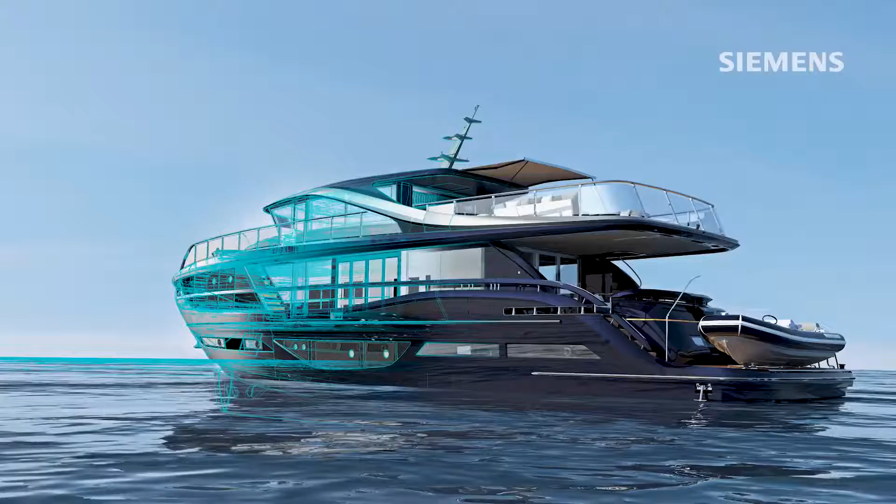Earlier this year, the industry market analyst CIMdata commented that Siemens continues to innovate and reimagine CAD design in a way that truly looks to the future of design. And this shows that we're continuing to innovate, helping our customers embrace complexity and reach their productivity goals. Our customers across all industries love using NX, like Princess Yachts, who've seen significant design efficiencies using NX, enabling them to create more complex interiors and better overall designs.

Or JCB, who are driving towards a more sustainable future with their 100% electric, zero emissions e-tech range. They're leveraging the digital twin to enable more consistent collaboration with a single source of data. And Red Bull Racing, working to an aggressive F1 race schedule. Through productivity gains with NX, Red Bull Racing were able to compress the time from initial design through to wind tunnel testing down to just 10 days.

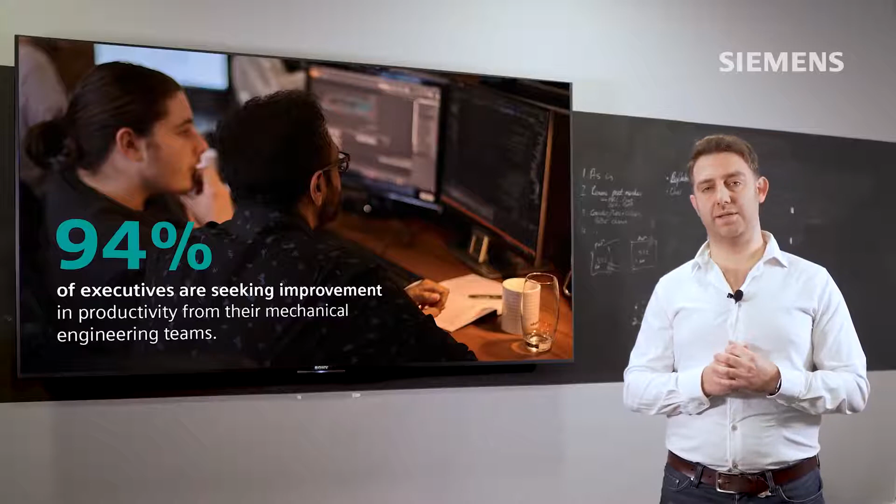Productivity is a key driver for all our customers. In a recent study by Lifecycle Insights, it was discovered that more than 94% of company executives felt that either a good amount or some amount of productivity improvement was needed from their mechanical engineering teams. Productivity and the ability to do more with less clearly affects the success of the products being designed and also the companies creating them. Taking the latest release of NX is one of the best ways to help you achieve your productivity goals.

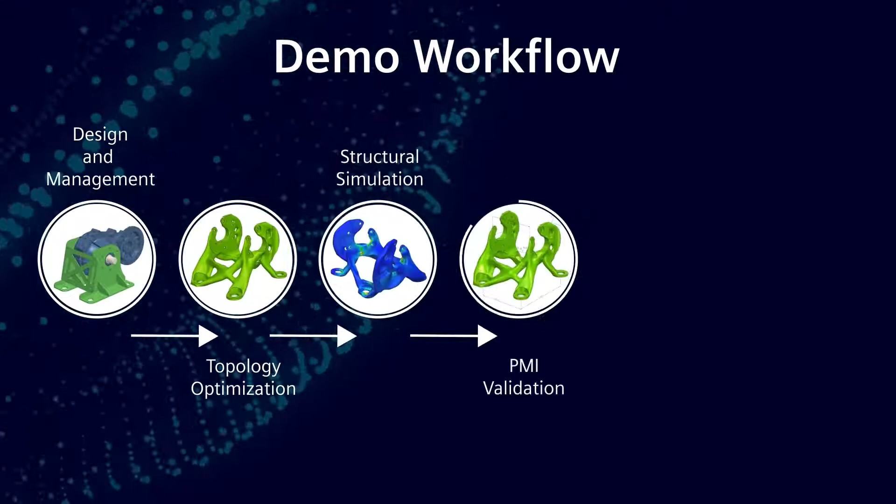For today's session, we're going to focus on a workflow that shows you how to automatically create new parts using the all-new NX Topology Optimizer. Then we'll show you how to test and validate your parts before 3D printing. We'll be showing you how you can reduce this group of 14 parts down to just a single part and also reduce the weight from around 4 kilograms down to about 2.5 kilograms. Typically, this would have required some very manual tasks by the design engineers. But NX is helping you embrace complexity and increase productivity, whilst also helping you reduce the number of physical prototypes. So, let's get into it.

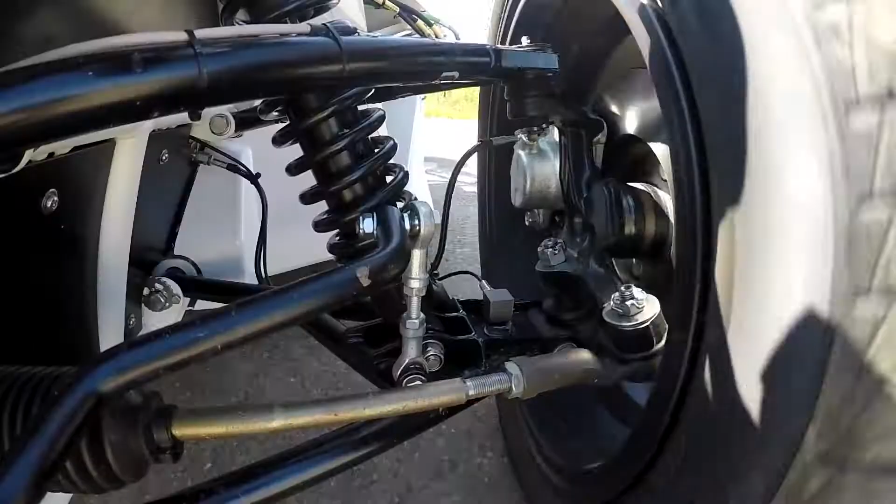Imagine we're designing a next-generation electric vehicle. In order to maximize the range of the battery system, we need to optimize the weight of every single component. In a design review of the team, the design manager identifies a group of components that could be improved. The design manager sets a target to reduce the number of components from 14 down to 1 and sets a weight reduction from 4 kilograms down to 2.5 kilograms. She creates a change request in Teamcenter and sends it through to the design team. And now to take you through the next stage of the demo, I'm going to hand over to Paul.

Well, thanks, Ben. Well, here I am in my NX session. It's a managed session, so I've got access to my Teamcenter database through Active Workspace embedded inside of NX. And I've got some tasks to perform in my inbox. Let's take a look at them. First one here is related to the gearbox bracket that Ben's just mentioned. If we delve a little further down, we can find out exactly the details of the task.

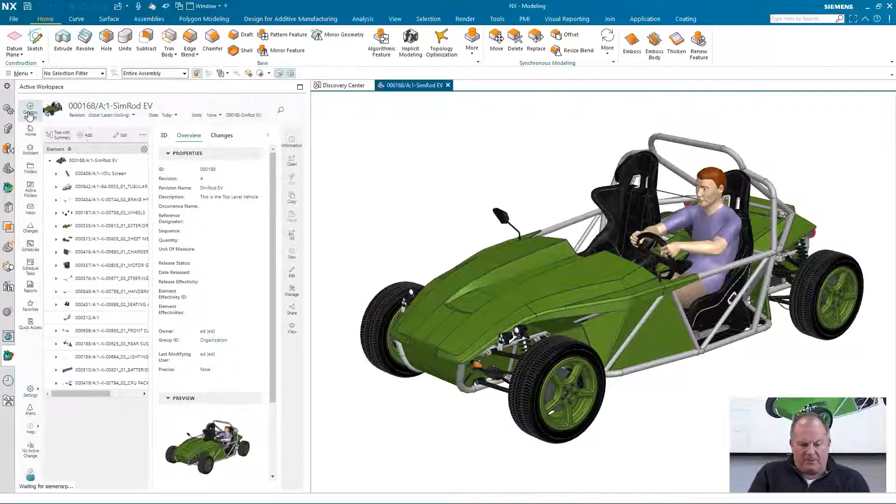And it's to use a Topology Optimization study to look at reducing both the weight and the part count of the existing bracket. Now, not only does it tell me what's required from me, but it also gives me the impacted items. So if we take a look down here, you can see obviously one of the impacted items would be the overall assembly. And we can take a look at this in a bit more detail just by opening this up directly inside of NX. Let's take a look at some of the other impacted items. So again, we just go back into our Active Workspace.

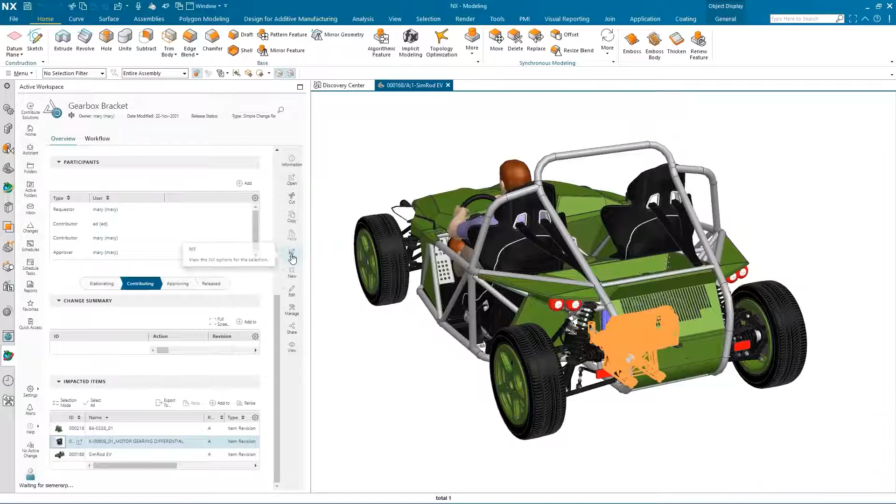If I select it, notice that the corresponding geometry in the NX session is highlighted. So we have this cross-probing, particularly useful to understand the impacted items and where they fit within the assembly. And again, if I want a bit more of a level of detail, we can open this up inside of NX as well. So you can see here the bracket and the gearbox.

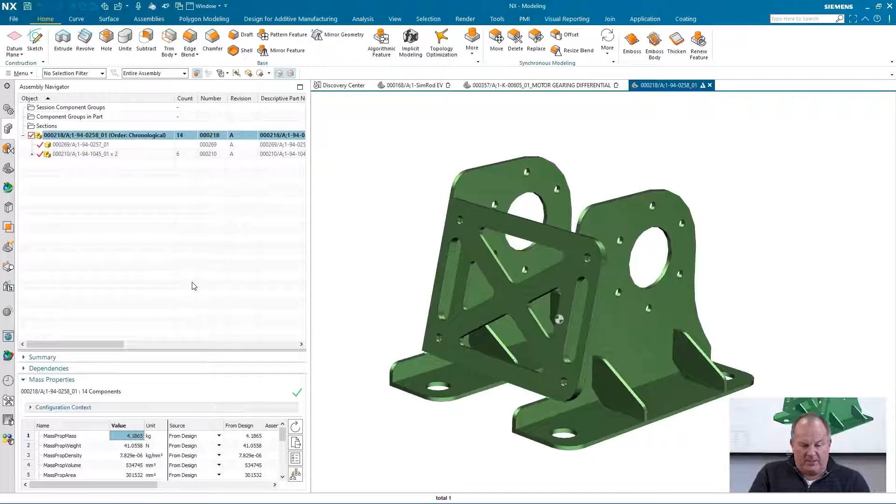Again, let's just open up the bracket. Now, as you can see from my assembly navigator, there's 14 components currently, so we're looking to reduce that. And if we take a look at the weight, notice that the current value is just over 4 kilos.

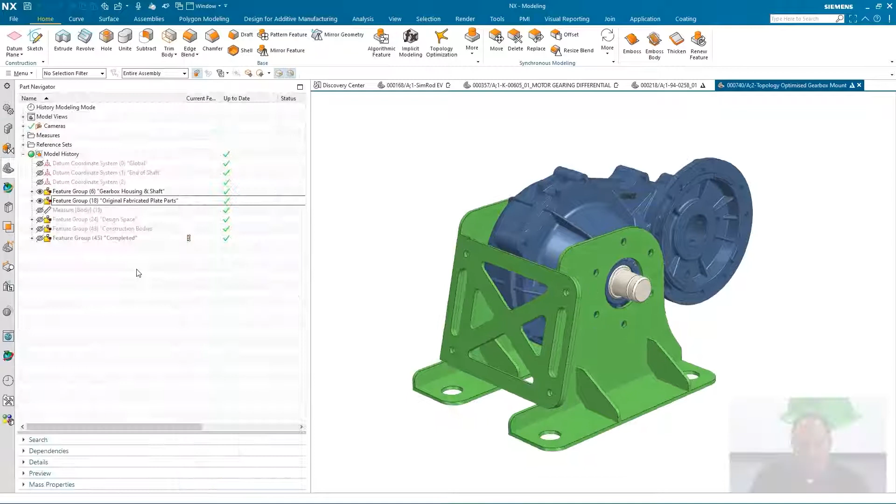Now, I've already got the start part of a topology optimization study done, so let's just go and find that. Again, if I go back into Active Workspace, I'm going to do a search for it. There it is there. And again, let's just open this up inside of NX. Now, what we'll do here is to go through the process of setting up the topology optimization. So again, we start the optimization feature, open it up, and we have our own environment.

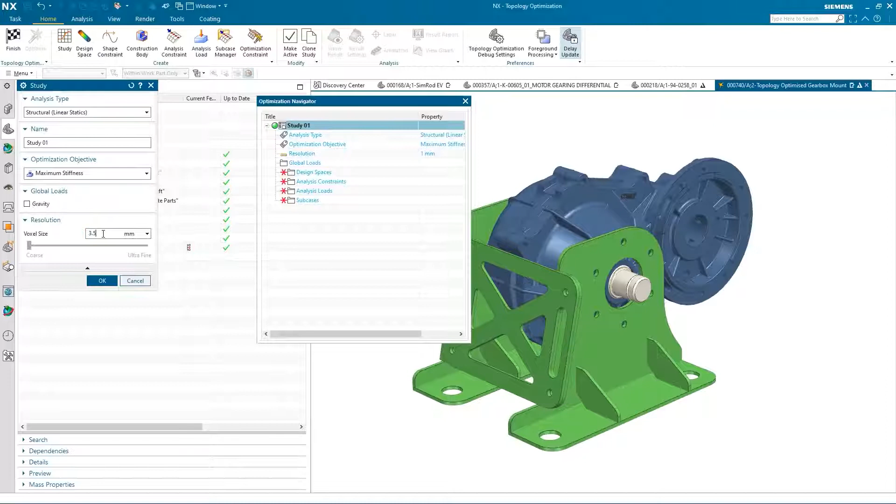And one of the key things to remember about the optimization itself is that it's now an NX feature, which means that if any of the geometry changes, then your optimization feature will also change to reflect any of those modifications. Now, I'm going to perform a study, so I'm going to edit this study. There's a particular analysis type, the objective, I'm going to look for maximum stiffness. I can modify the resolution of the result. Again, you notice that the Optimization Navigator updates to reflect that.

And I'm just going to hide now the original gearbox housing and shaft and the original fabricated part. But before I do that, the stages that I'm going to go through is I need to define a design space. So this area, or this volume, if you like, is going to contain the topology optimization study. So let's just create the design space. So again, I select the box. Notice that it automatically picks up on the material that's been predefined for that particular box. It's an aluminium, and now that's been added into my optimization navigator.

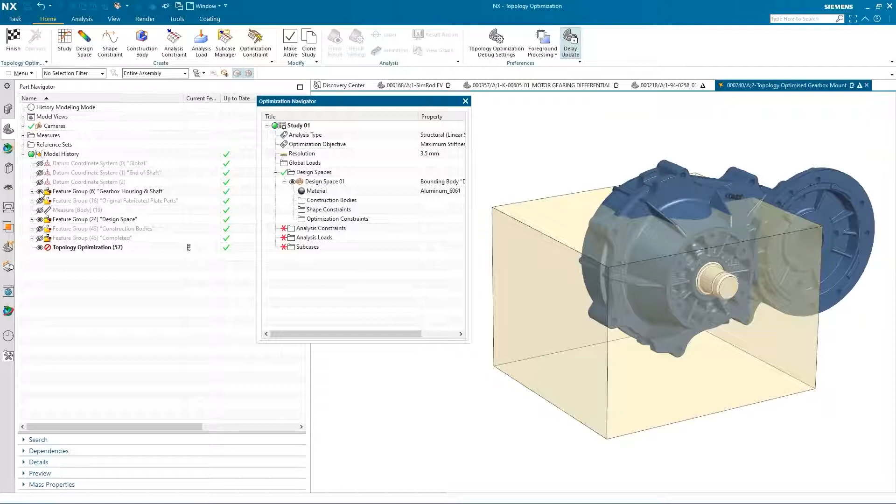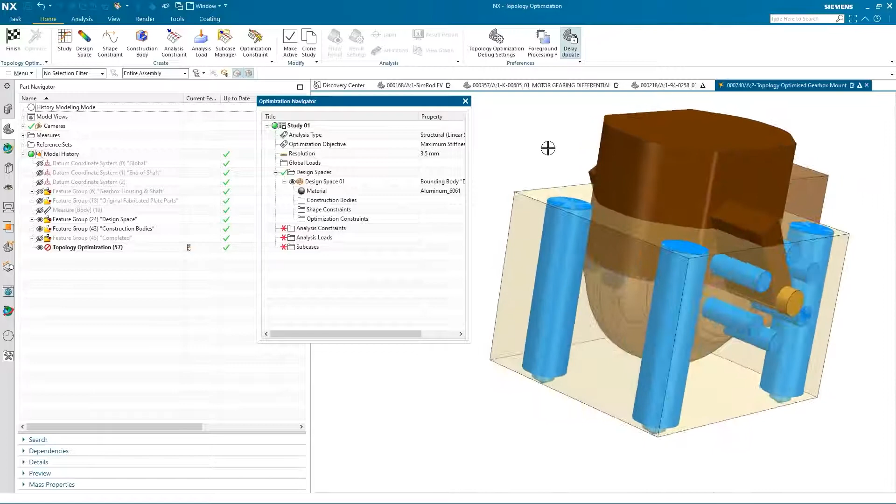Let's just hide some of these pieces of geometry we don't want to see at the moment, so I'll just hide that. And I now need to look at some construction bodies, and these construction bodies will contain geometry that you want to use as a keep out. It'll also contain geometry such as where the bracket needs to be fixed, both the chassis and also the gearbox itself. So let's take a look at the construction bodies. You can see here there's several different construction bodies, and I'll explain exactly what they do as we go through and create them. So first things first, let's create a construction body.

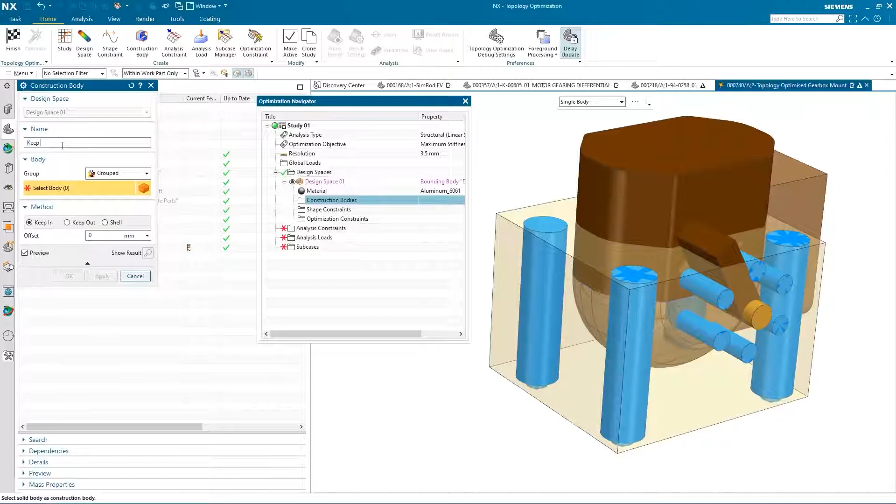I'm going to group these together. So this one is going to be keep outs. Okay, and I'm going to specify these two solid bodies. So what I'm asking for there is I don't want to see any of the optimization study encroach into that particular area. I need that to be kept free of any geometry, because that's basically where the gearbox will be sitting. I'll just remove those. And now I'm left with construction bodies that are going to define where the bracket fixes both the chassis and also the gearbox. And also we need to create some clearance for the shaft, so the gearbox can be dropped into position.

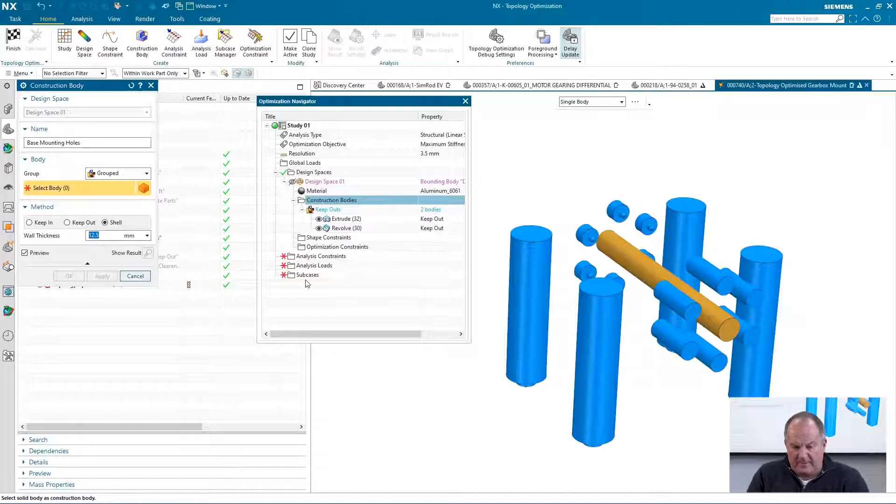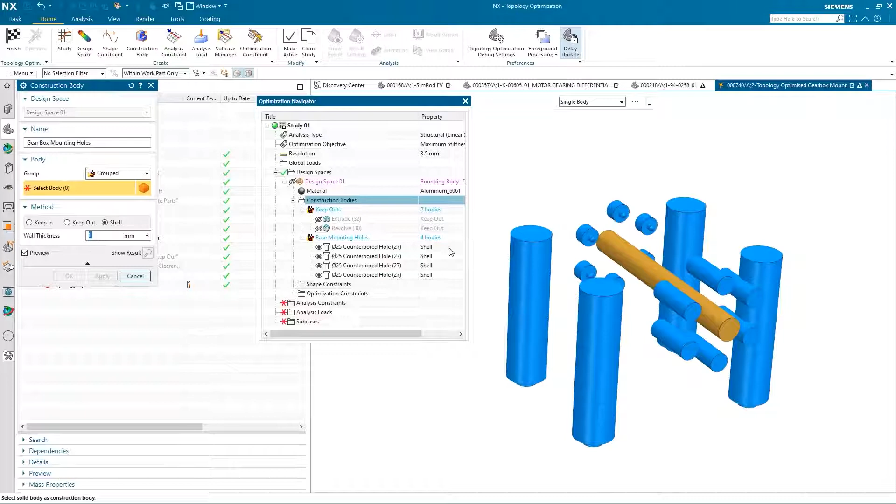So again, let's create some more construction bodies. So again, we'll have another group. This one is going to be the base mounting holes, and I'm going to select these 4 bodies here to define that, and then we're going to create the fixings for where the bracket is attached to the gearbox itself. So let's again create a group for these, and again we'll select these 12 solids here that define where the gearbox mounting holes are going to be. Again, all the while you can see them being added to the navigator.

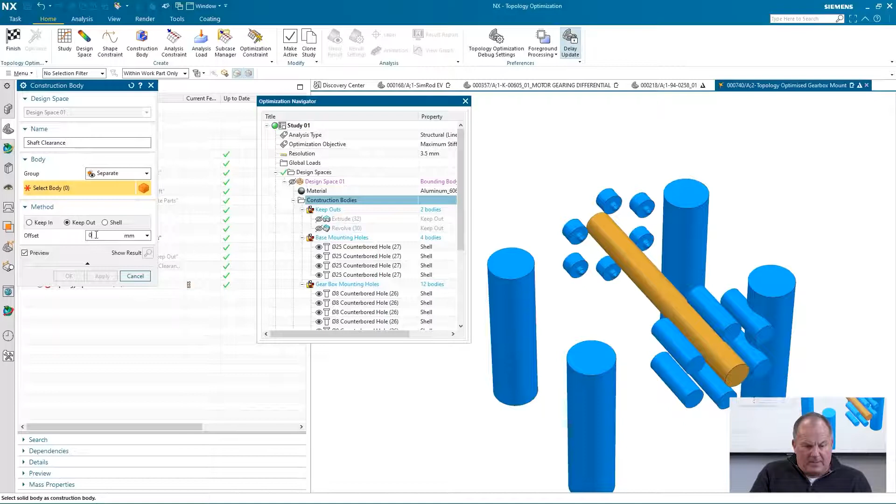And then the final one is going to be the clearance for the shaft. So again, let's just call this shaft clearance. And it's going to be a keep out. I'm going to give it an offset of 10 millimeters. Again, select the body, you can see the offset's been applied, and those are my construction bodies defined.

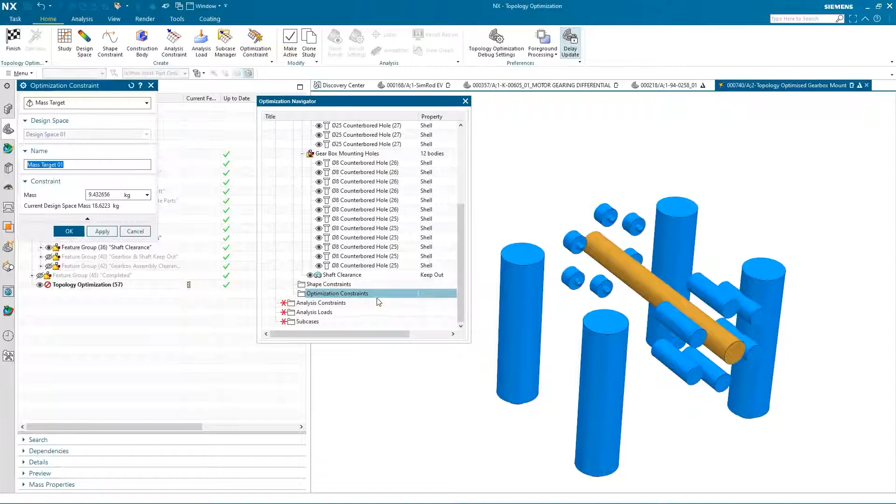So the next stage would be to add some optimization constraints. I could add some shape constraints, but in this case I don't need to. So let's add optimization constraint. And apart from obviously reducing the part count, the other part of the study was to reduce the weight. So I'm going to specify that I need this new bracket to be equal to or less than 2.75 kilograms.

I need some constraints. So every topology optimization study would require some analysis constraints. And what I'm doing is I'm going to select these 4 faces here to be fixed. Now, there's a set number of load cases that I want to add, and I'm going to specify 4 specific load cases. So again, there's a default one, but I can just add another 3 very easily.

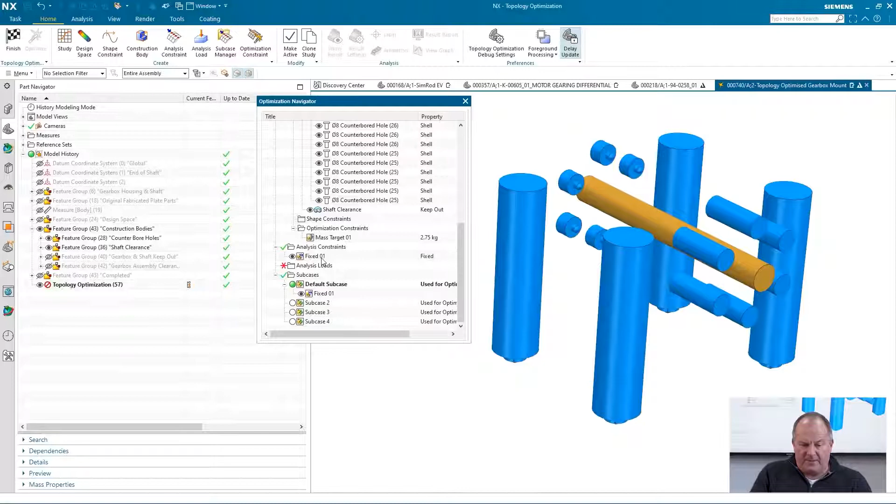And I also want to add that fixed constraint into each of the other subcases. And it's easy to do. I can just literally drag and drop into the subcase.

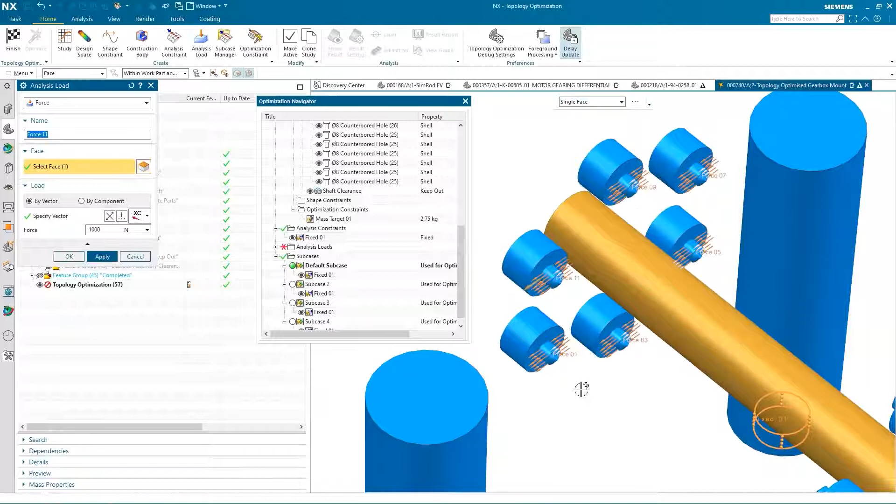So the final piece of the puzzle, if you like, is to add some analysis loads. Okay, so I can specify a vector or a component. In this case, I'm going to go for a vector, specify a value. And now I need to attach these loads to areas of the bracket. So these fixing holes, for instance. So again, I just pick on the faces and attach these loads to the one side of the bracket and then the other side of the bracket.

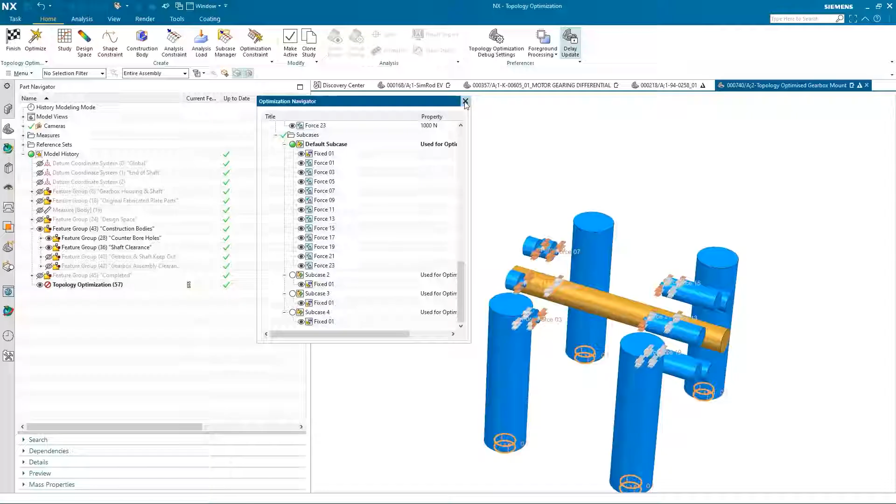And I would do that for each of the subcases. Slightly different load, slightly different direction, but it would be done for each one of the subcases. And then you utilize all of these subcases during the optimization study. When those were completed, I would then go into the optimizer itself and start the optimization study. Now this took around 5 or 6 minutes to do. I'm not going to do it live in this particular session, but I do have one that I've already completed, and we can take a look at that.

So let's remove the construction bodies. Let's bring back the gearbox housing and the shaft, and bring back the one that I've already completed. And there you can see it. So again, I've got that clearance that I've set, so I could bring the gearbox in. I've got all those keep-out areas as you noticed again, so there's no geometry inside of here. And I've got the construction bodies that I used for the base mounting holes and the gearbox holes included in there.

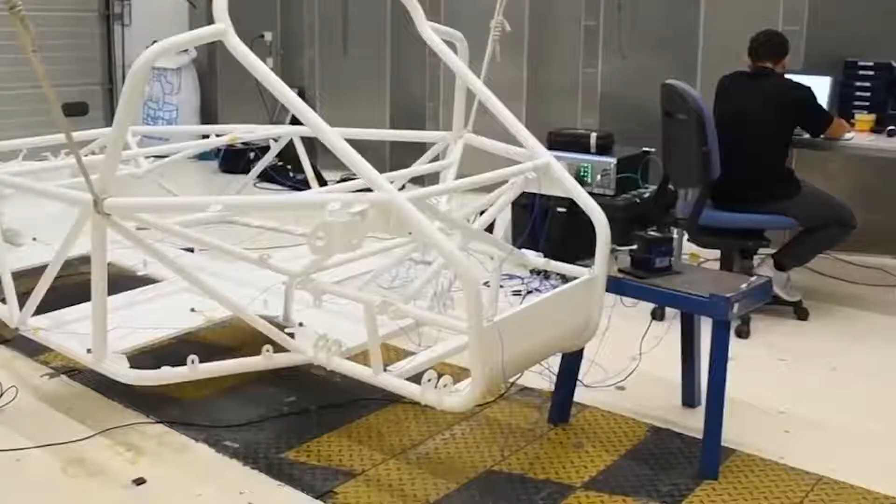Later that day, Paul, who is in the UK, calls Jeff, who's based in the US, to discuss some design simulation for the new part.

Hey Jeff, how you doing? I'm good. Hey listen, I've got something I'd like you to take a look at. It's a topology optimized part. It's a gearbox bracket. So I'd just like you to check it and validate that it's fit for purpose. Okay, I can see your screen now. Okay, so you can see that it's an interesting shape. It was optimized. I just want you to check out that there's no areas of concern that we need to be aware of. Okay, I have a good idea of how I can analyze this. Let me take a look, and when I have some results, I will give you a call back. Appreciate it. Thanks very much. Yeah, you're welcome. Anytime.

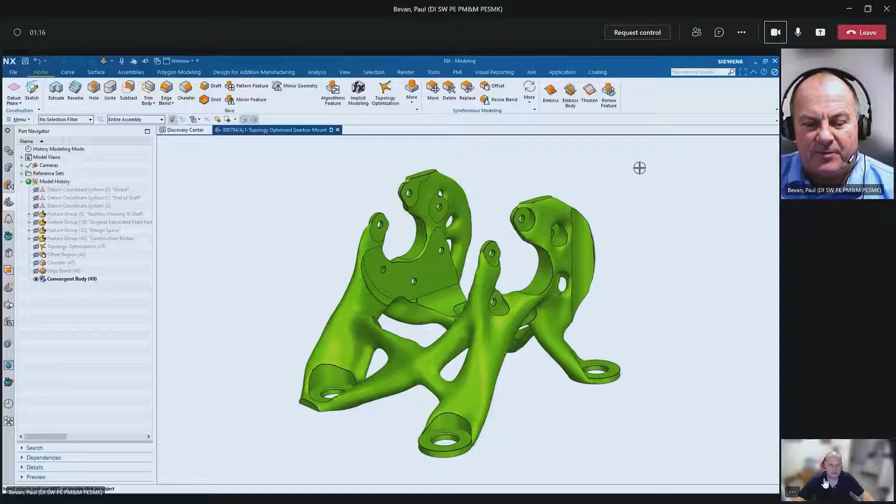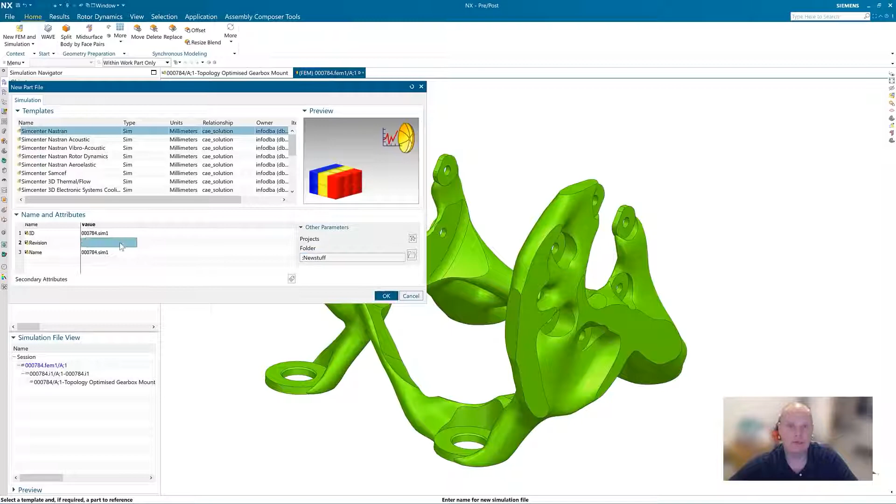Follow me along to perform a design analysis so that we can give Paul the feedback that he needs. We will start by loading the optimized part, which is a convergent body, from the server. We will use an application inside of NX called Pre-Post to perform the analysis. We will create 3 files to contain all of the CAE data that we will be generating. The SIM file will store information such as loads and boundary conditions. The FEM file will contain our nodes, elements, and material data. An idealized part is created as a duplicate of the CAD model so that we, as an analyst, can make changes without disrupting the workflow of the designer.

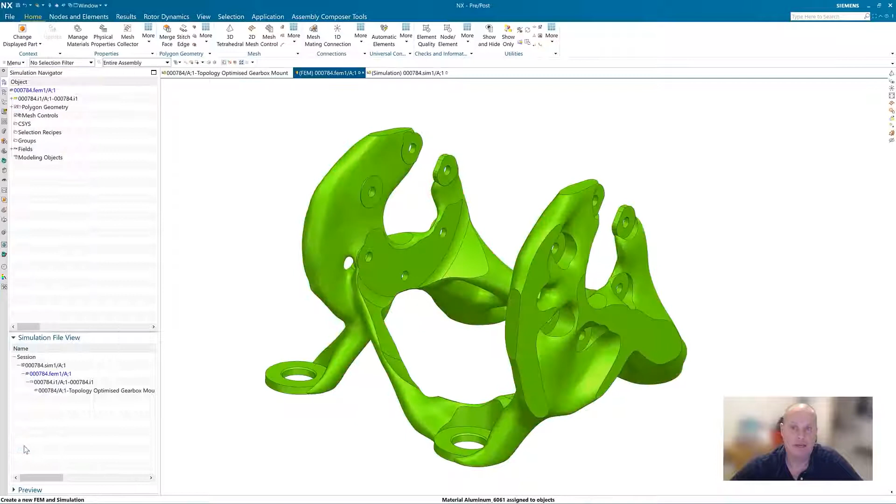Next, we need to assign a material to the part and then generate a 3D mesh. I like to click on the lightning bolt to get an approximation of the recommended mesh size. Don't go any larger than this, as it can make for a poor quality mesh. A reasonably smaller number than the recommended size will give better results without forcing the solution to take too much time.

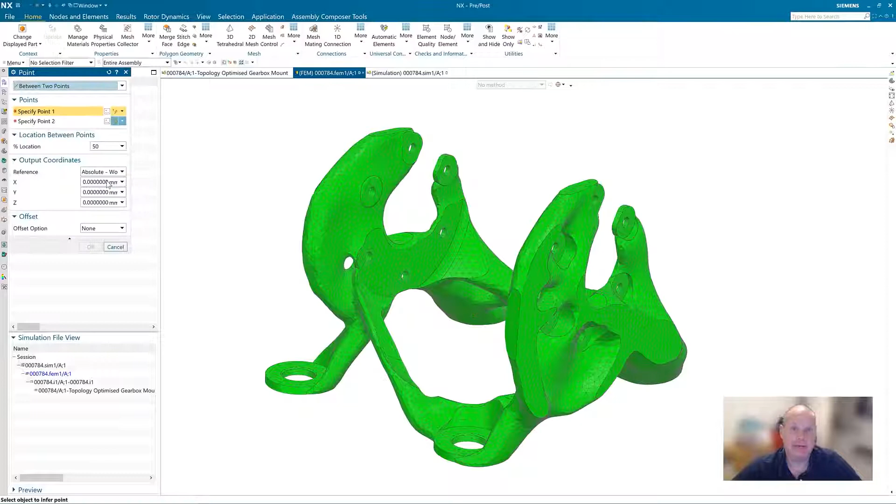Now we need to create a rigid element with its base node at the approximate location of the center of mass of the gearbox that attaches to this mounting bracket. We don't need to be exact for this analysis, as we are only trying to provide baseline guidance to improve the quality of the design. Use the between 2 points method to get an approximate location. Now that the base node of the rigid element has been created, we will connect it to all 12 of the mounting holes on the bracket.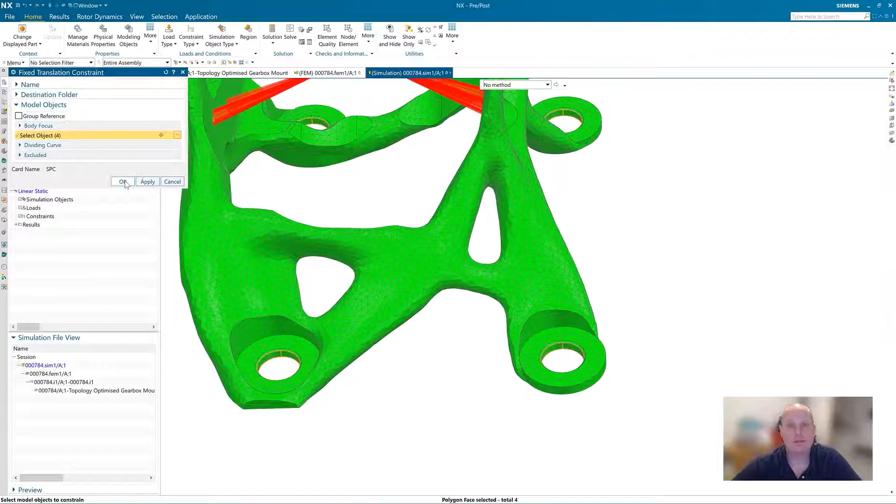Now we will move on to the simulation to create our boundary conditions and to solve our model. Our boundary conditions consist of constraining the bracket at the 4 mounting locations. The load is applied at the approximated center of gravity of the gearbox. It is meant to imitate a force of 3 times gravitational acceleration in the direction of travel of the vehicle. The mass of the gearbox is used in the magnitude of the force. Solve your model using the integrated Simcenter Nastran solver.

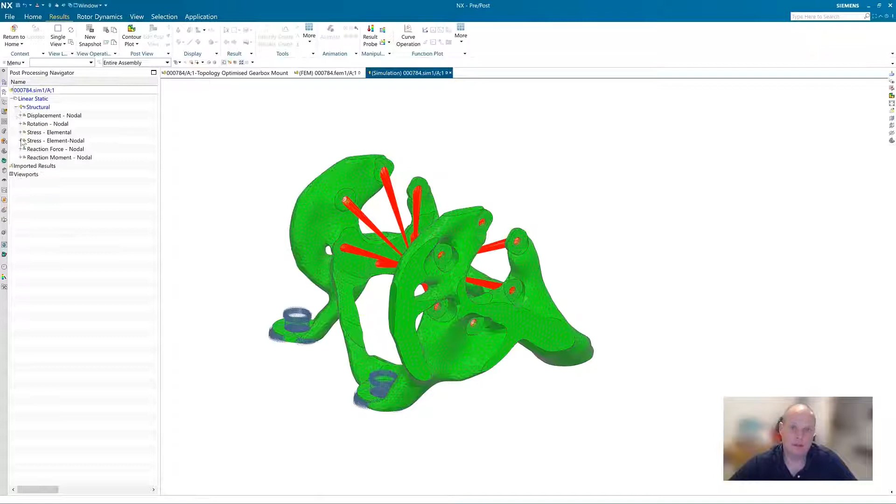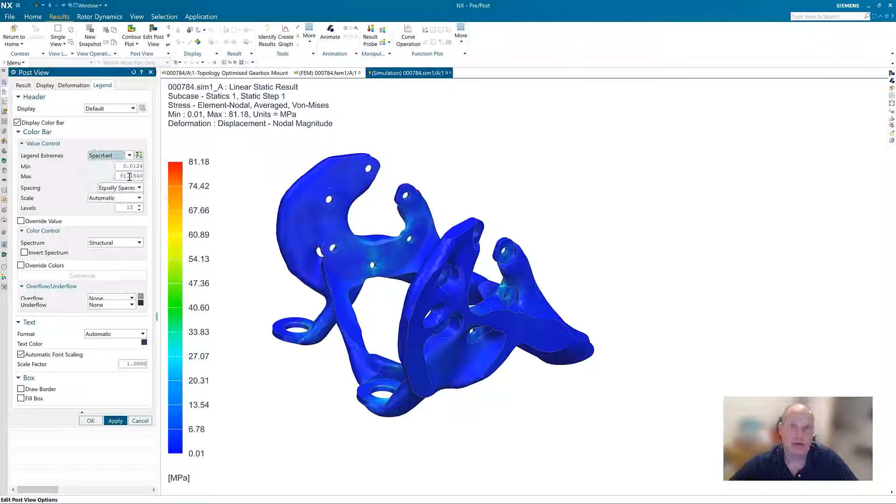This should only take a couple of minutes depending on what kind of computer you are solving on. Now comes the reason for performing the analysis, evaluating the results, and giving recommendations to your CAD designer. When displaying stress results, it is a good idea to turn off any elements that are not needed, clean up the display by turning off element edges, setting the results to average at nodes, and finally changing the scale for effect. Let's interrogate the CAE results so we can make recommendations to Paul.

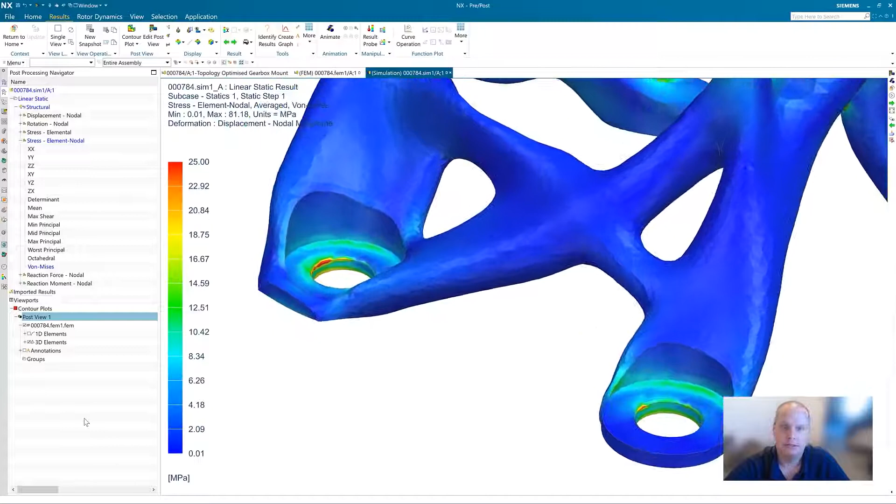Every structural analysis will indicate the locations of maximum stress with a red color contour. You will see a few areas in the model that have a color red. But we do not need to be concerned, as the overall magnitude of the stress is very low. The results indicate we have a good design that will be able to handle the performance requirements for the part. Later that evening, after Jeff has finished his simulations, he gives Paul a call to share the results.

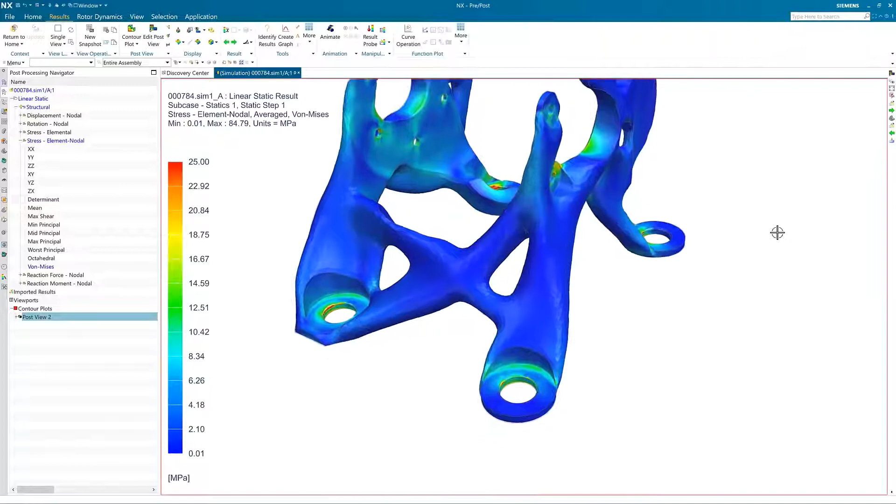Hi, Paul. Okay, are you seeing my screen? Yes, I am. Okay, so I just wanted to point out a couple things. First of all, when I zoom in on the 4 mounting holes, you're going to notice the red spots. You can ignore that because that's just a result of the way that I set up my model. So those are artificially induced high stresses based on the boundary conditions.

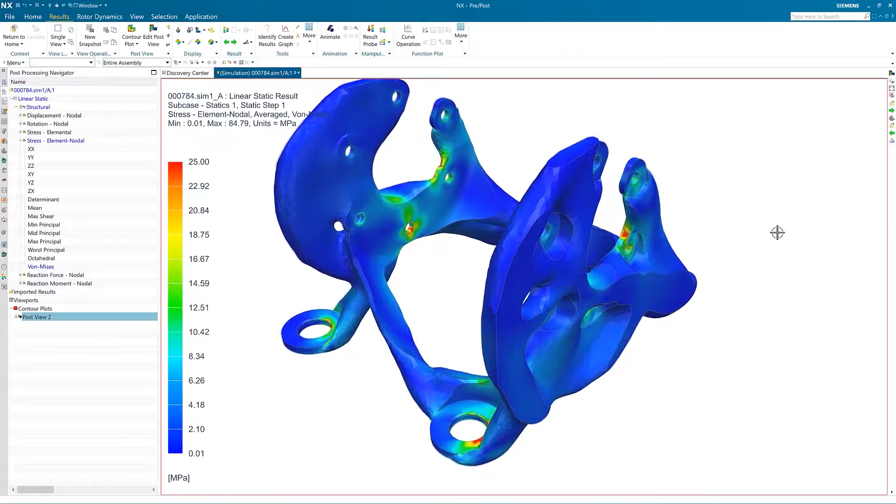But when I interrogated the model and looked at the results, I do see that the overall stresses in the rest of the model are very low relative to the endurance limit for the material. So I would say that you're okay from a structural performance standpoint.

That's good to hear. All right, well, thanks again. Yeah, thanks. It's always good to work with you.

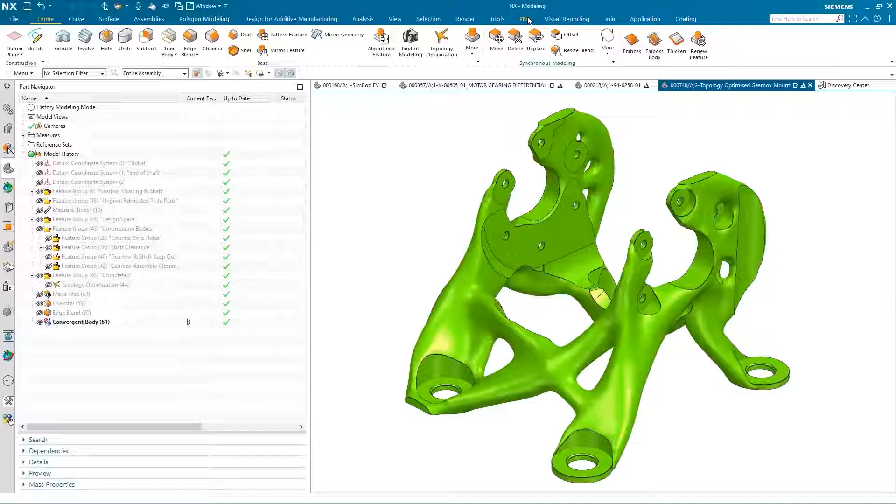Back at the office, Paul begins implementing the changes recommended by Jeff. So the next stage of the process is to start to document the model using model-based definition, and in particular, product and manufacturing information, or PMI. So I enter the PMI application. I have a number of commands that are available to me to document the geometry.

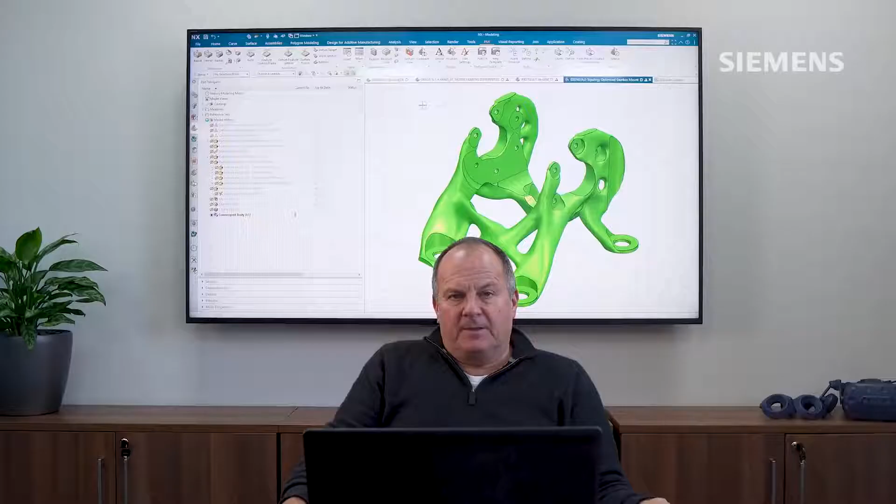Typically, I'd select one of the commands and start to pick geometry off of the topology optimized result. But in this first instance, I'm going to use one of our pre-configured rules. These automate the ability to apply PMI to the model. So in this instance, I'm going to look at creating the size on all of the holes in my model. I invoke the rule. It's now intelligently searching the model to find all of the holes within the part and applying the PMI information directly to it.

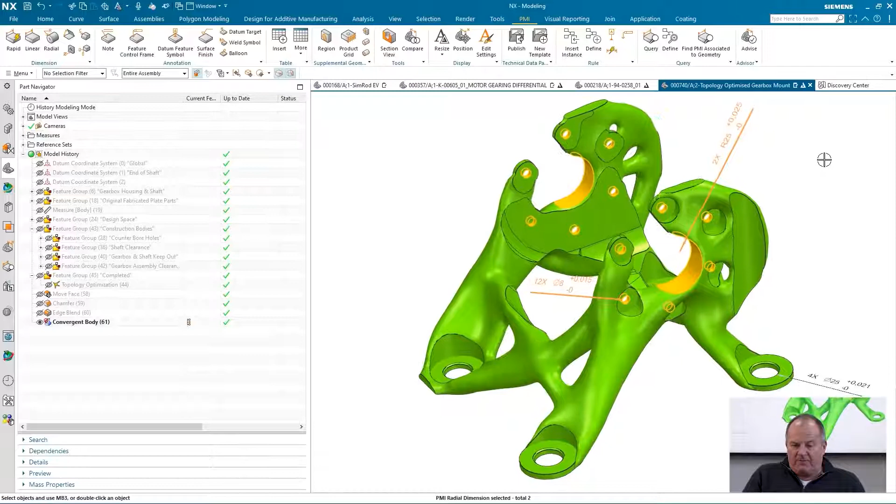And as you can see, it's found the 12 holes that connect the bracket to the gearbox, the 2 large holes through which the shaft passes, and the 4 holes that are used to connect the bracket to the chassis. Now, as I said, there are a number of other commands that we can use. So if I want to add further PMI, again, I can just pick geometry directly off of the model.

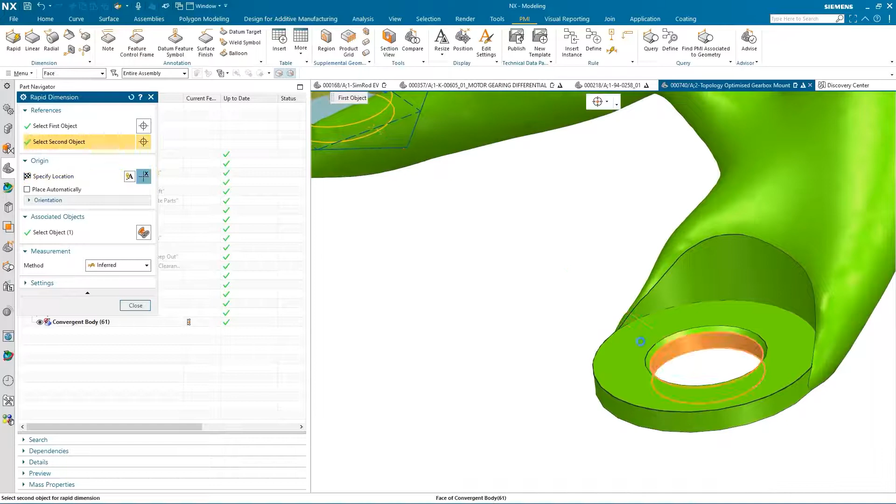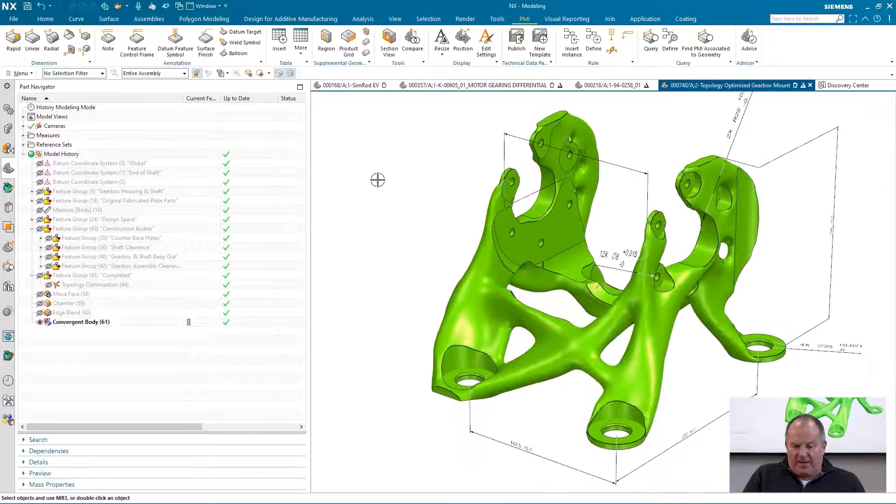Okay, we're going to add some tolerance to that. And again, it's as easy as that. I'm just literally picking geometry straight off our optimized result. So we could continue, obviously, to completely and fully document the model, but you get an idea in this demonstration of some of the power of being able to apply and fully document a model with PMI, either manually or with one of the pre-configured rules that we have at our disposal.

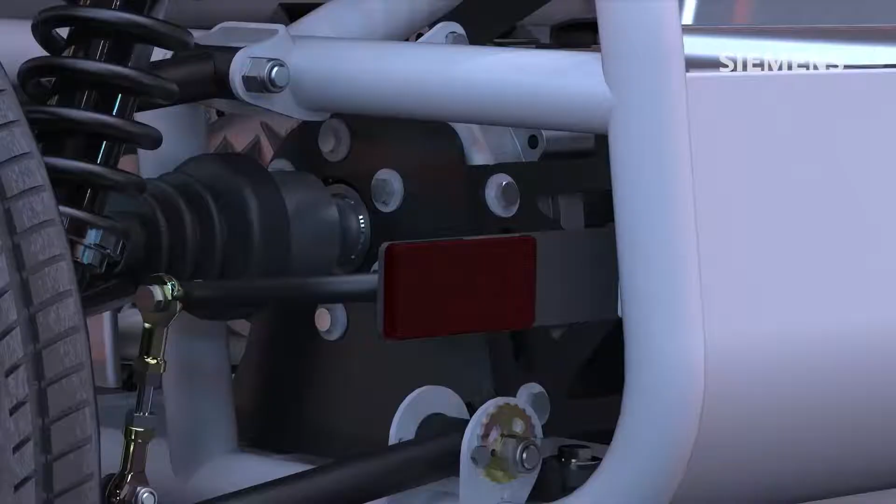In the final part of this section of the demonstration, we're going to replace the existing bracket with this new optimized model. So let's take a look at doing that. Okay, we'll pull up our subassembly that contains the original bracket. And the first thing I want to do is to remove that. I can also remove these other components.

Let's add our single piece bracket in. We know the part number. Let's see, we've got a thumbnail of that. Let's snap that to here. Just position it like so. And then we can use the assembly constraints. And there we have it. Our part is now being added in to the original assembly.

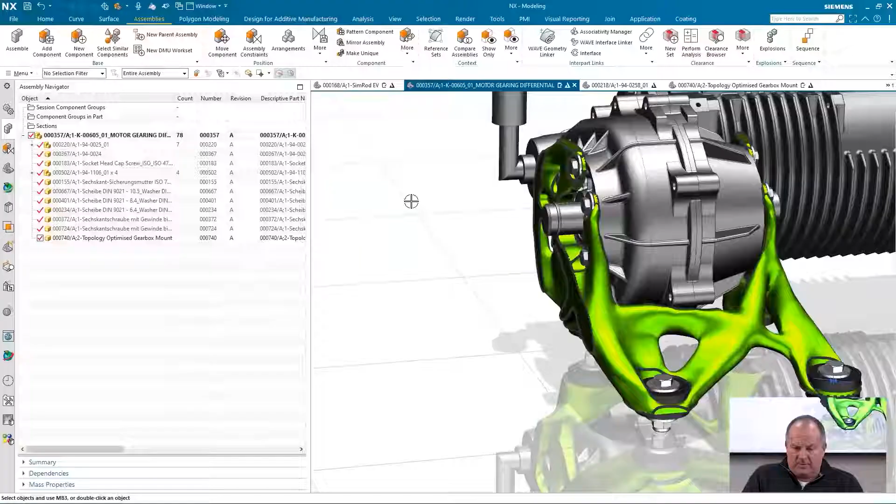If we take a look at the top level, again, let's just take a look inside. You can see that our new bracket fits nicely within the overall assembly. I've completed my tasks. I've done the topology optimization study. I've then done some modification to the result, adding some NX features, adding some PMI, and now I'm going to hand it over to my colleague Ashley, who's going to check to make sure that it's 3D printable. So I'm just going to give him a call.

Hey, Paul. I've just done a topology optimization study on this bracket for the gearbox for the vehicle. I think it's come out rather well, but I'd like for you to take a quick look at it. Yeah, okay. So like a little validation just to make sure it's printable, and I guess we should throw it into a build tray, create some support structures.

And we're planning on doing this on a Renishaw, right? Correct, yeah, that would be really good. Sounds great. No problem. Take care.

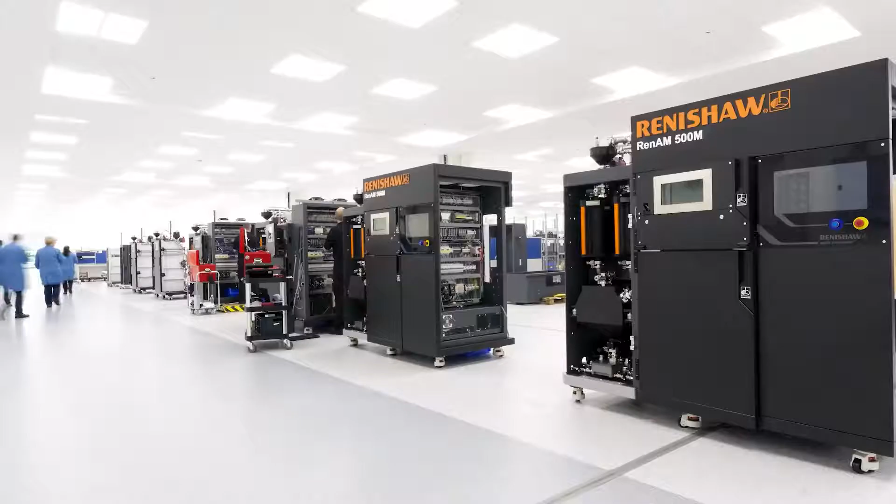Bye. Hi, everyone. So Paul's given me this really great topology optimized part that he sent over. It's for some sort of motor mount, gear mount, gearbox mount, that sort of thing for an automobile. And so we're going to print this part using aluminum and additive manufacturing.

The problem here is that additive manufacturing is really accurate these days, but it doesn't always produce parts that are accurate within tolerance. And if you want exact surfaces within some really tight tolerances, then you often need to print your part and then send it on to a downstream machining step. And that's what we're going to do here.

Now, to do that, I need to alter this geometry a little bit so that it has the material it needs for the post-print machining, so that we can machine those parts away and get the exact surfaces we need. So I've got to print a part that's not exactly the part that Paul sent along, but sort of an interim version of the part. And then when Joe gets the part and does the machining, he will machine it back to the exact surfaces that Paul has designed.

Now, the great thing about this particular part is that it came out of our new topology optimization system, where we get actual faces inside the model. So I've got my selection here turned to face, and you can see that straight out of topology optimization, we've got things like these holes have actual faces, and these planar regions are actual faces. So that makes it very easy for me to go through and do the modifications I need to do to get this part ready for printing.

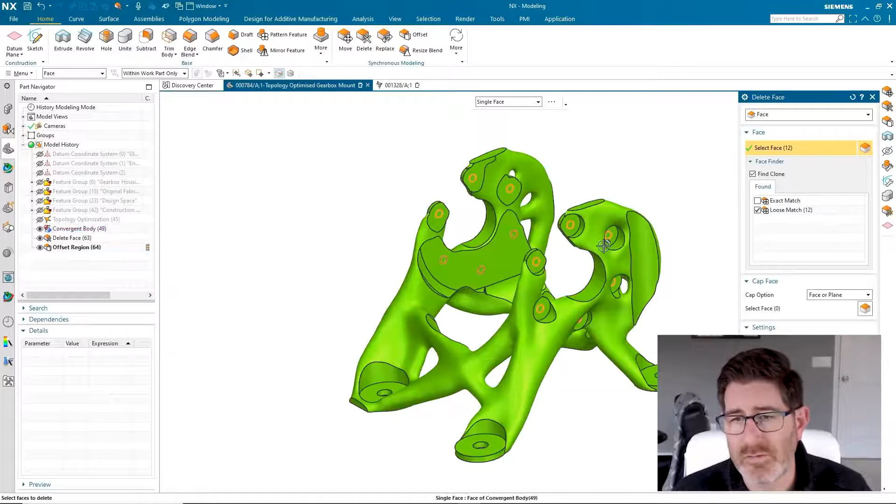These top holes I'm just going to get rid of. They're small, and again we need some meat up here, so I'm going to tell it to loose match those. It's going to find all 12. Those I'm just going to get rid of. We know where they're at, we know what the diameter needs to be. I'm just going to fill them in, and we'll have those ready for machining as well.

The final step is down here on the bottom. We have these 4 sort of feet, and we want those to be all perfectly planar so that when we mount this in the car, it's not going to wobble, it's not going to torque and have any undue stress put on it. We want those to be perfectly planar. So again, we're going to build up those surfaces just a little bit and machine them back so that they're perfectly planar.

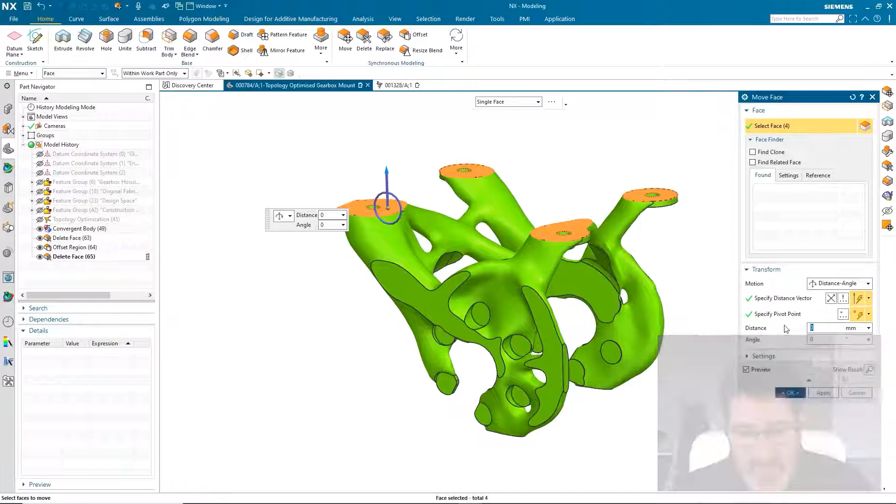I'll use the move command to do that, and I'm just going to pick each one of these faces here, and I'm going to move them up by about 2 mils to give us enough material to machine away. Hit OK, and again, this is all done, what has it taken me, 2 minutes maybe to make all of these edits? If you were doing this with a system where you had to just edit the facets, you would not be doing this in 2 minutes. This would be a project.

So you can see how easy it is in our new system with the new topology optimization, the types of geometry it returns to get a part prepped for printing. The next step is to put that into a build tray, so I'll be back in just a minute and

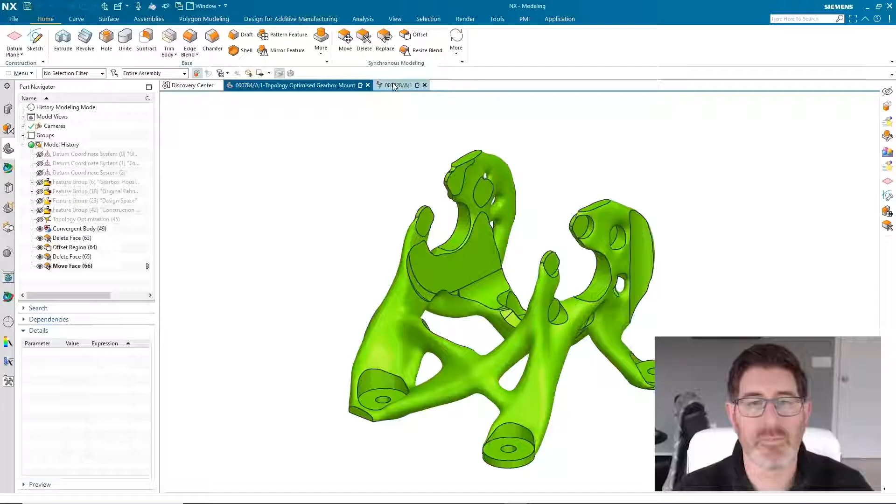we'll do just that. So we now have a part that we've designed for additive manufacturing. We've manipulated the geometry. Now we need to put it into a build tray and get it set up for printing. So I'm going to go over this part where I have basically an empty part. I'm going to select my printer, and then I'm going to add the part to the build tray.

Now I don't really care where this part comes in. It's probably going to be thrown out in space wherever it was in its native assembly at the moment. But I don't really care because I'm going to take that part and I'm going to run it through a new system we have for correcting for distortion.

So one of the real problems with additive manufacturing, especially metal additive manufacturing, is distortion. Now that can throw a part out of tolerance. It can even cause failures within the print where you end up with a really expensive door stop. Lots of these things can be mitigated by controlling the distortion that the part goes through as the little bits of metal and the different layers of the part are heated up and cooled down within the printing process.

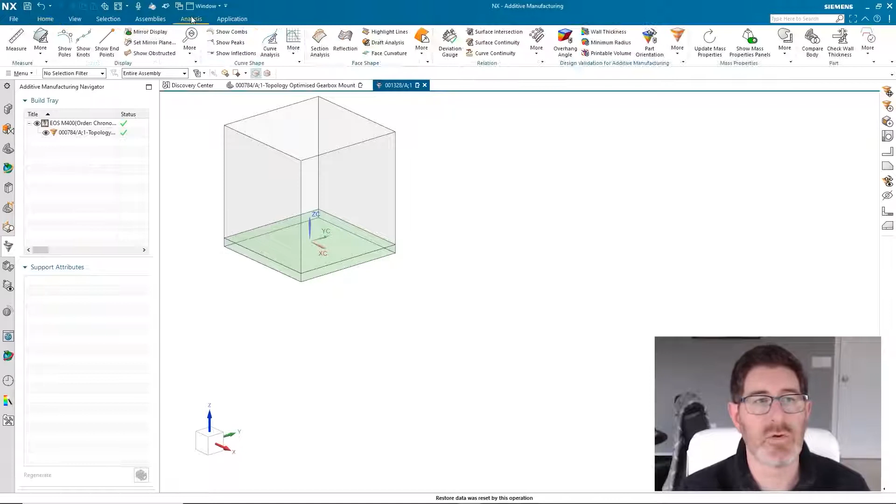Now, a lot of distortion problems can be alleviated by orienting the part in the proper orientation. And we have a tool that allows you to do that called the AM Build Optimizer. Now, in the latest release of NX, we have integrated that tool into the NX system, and it's up here under the analysis menu. If you go to more and say thermal distortion, you can invoke this tool.

Now, what this does is you pick your part, and the tool will take your part with a couple of characteristics you hand it here. It will upload your part into the cloud. It will run 100 different orientations of the part, running a simulation for distortion on each one of those orientations, and hand you back the orientation that has the least amount of distortion possible.

And then you can move on to building things like support structures and all the rest of the things you need to do to print. But this is one way to really help the initial print quality for parts without having to go through some really trial and error type operations that have been done in the past.

So I'm going to go ahead and invoke this system. It's going to go run and do about 100 different orientations, and it's going to come back with an orientation for me. And then we'll do a few more things to it and get it set up for printing. So I'll be back in just a minute.

So the system's come back, the AM Build Optimizer's come back, and it's given me this orientation as the orientation that it believes will give me the least amount of distortion. So now the last thing to do here is to create supports. Now I've gone over here in my support structure library. I've got a bunch of supports created here under this new support profile for blocks and cones and tree supports and all those sorts of things. And you can see that reflected over here in the dialog.

Now I can do automatic supports, which we'll do here in a second. We also have the option to do manual supports where I pick the areas that I want. The system finds the areas to support and I pick which ones I actually want to be supported. I can do regions only where I make regions that are supported, or I can do automatic, which is what I'm going to do here, where the system finds the regions it thinks need to be supported and supports them.

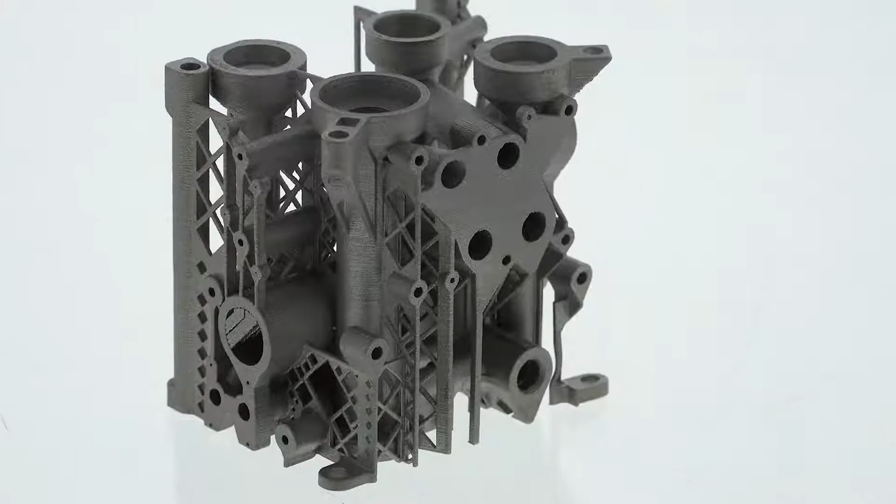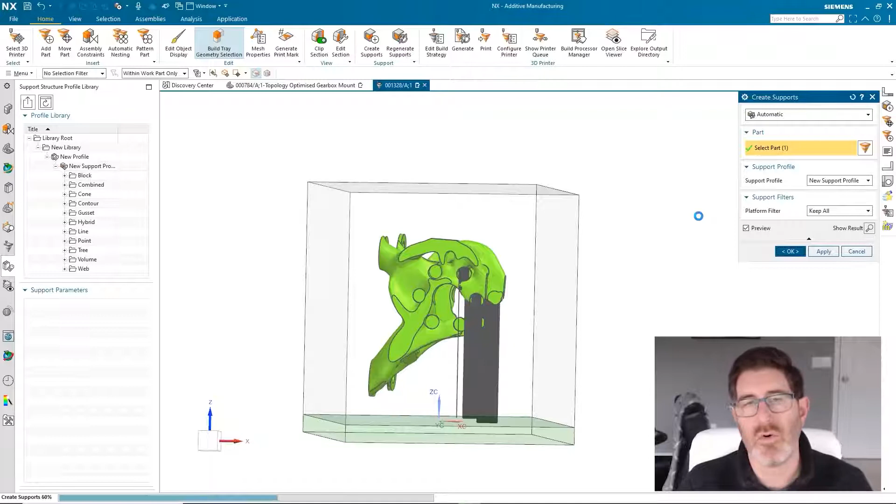So I'll select my part. I will get a preview, basically showing me these red areas down here where the part needs to be supported, and I'll say OK. And the system's going to go through and it's going to create support structures for my part so that when this part is printed, it's not going to sag or distort or have any effects of gravity on it, like you might see if you didn't support it properly.

Now, it's not going to maybe support all of those red areas it showed me. It's going to do a further analysis once I hit OK, further analysis in the preview, so I may get a warning here saying that some areas didn't actually need support. Yep, just like that. But now we have a completely supported part.

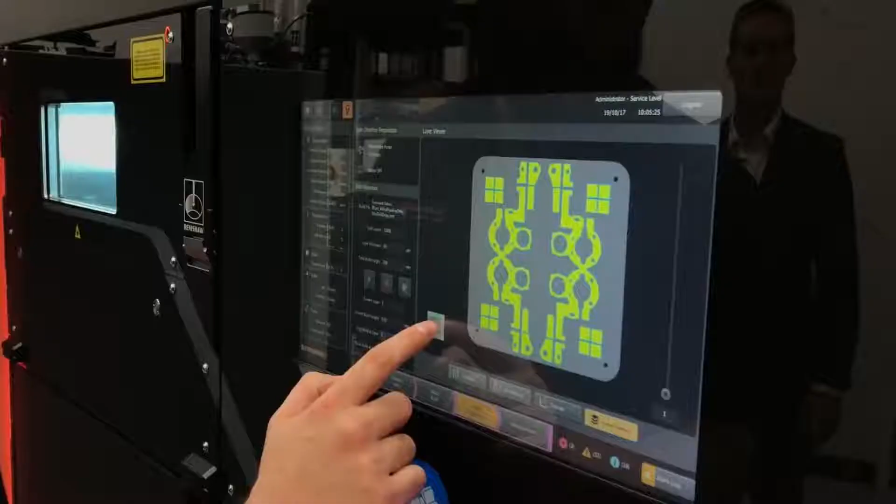I can take this part, I can set up my build strategy for my printer, generate the actual print commands, send those to the printer depending on which printer type you have, all directly inside of NX. And sometimes, depending on the printer, again, I can also look at the build processor manager and open the slice viewer to understand what each slice, what each layer of my print's going to look like, all from within inside the system, no STL files to drop, and all completely integrated from beginning to end.

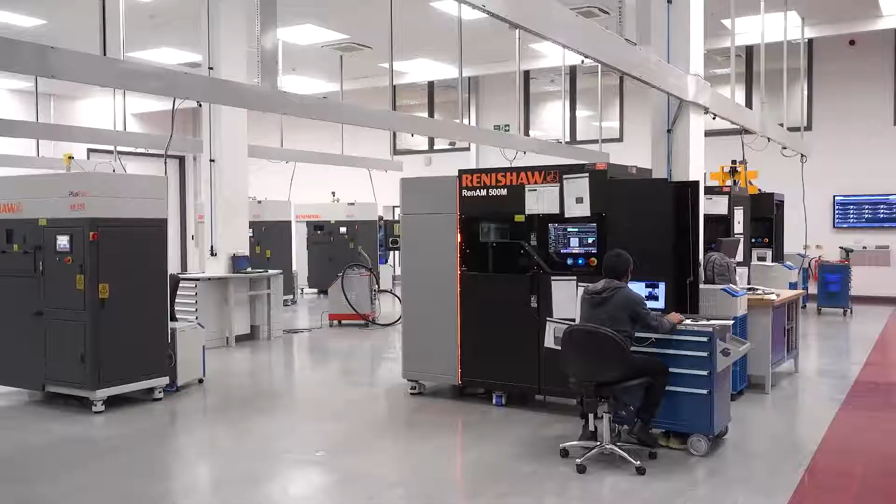So now I've got this part, I'm going to send it off to the printer. Once it's been printed though, Joe has to take over and do the machining steps to bring that part back to the actual part that Paul designed by putting those holes back in and machining those surfaces back. So I'll pass this portion over to Joe. Meanwhile, while the part is printing, Joe starts to prepare for the final machining processes.

For this part of the demo, I'll be taking this really nice organic looking additively manufactured bracket and putting it into the NX manufacturing application to do all the finished machining. The component you can see here is the part that was designed by Paul using the latest Topology Optimization technology, but I'll also be working with the data that was created in the AM application by Ashley, and this will be the physical condition of supply that the shop floor will be receiving to machine.

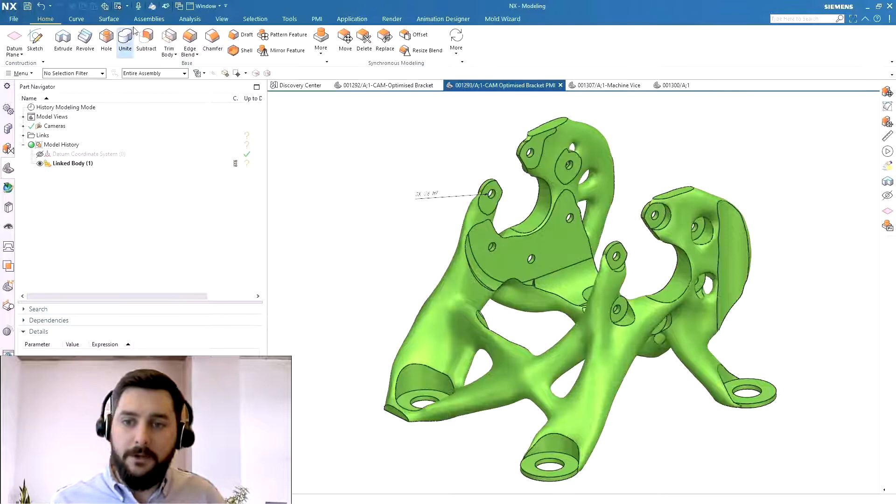Let me change the view to show you all the components I'll be using for the final machining within NX CAM. We have the design part. This is what we'll be machining to. Here is the condition of supply part, which Ashley defeatured in the AM application, and this is the part we'll be machining. We've got the standard vise fixture for the machine tool, and we've also got this custom fixturing to hold the AM component.

Because the part is not very prismatic and is very organic in its geometry, it's important that we design the correct fixturing to hold the component in the correct orientation for machining. These fixtures can be additively manufactured at the same time as the additively manufactured component, or machined in situ on the machine tool itself. So let's jump into CAM and take a look how I finish machining this component.

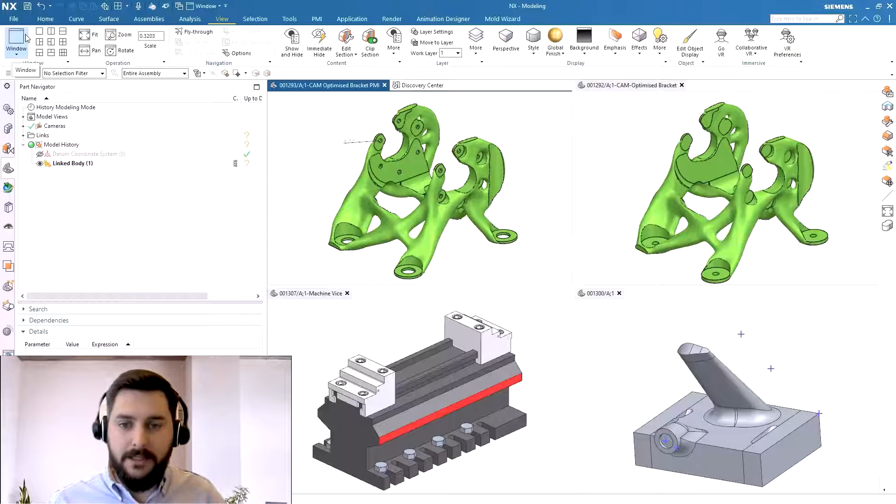A real benefit of NX CAM is having access to what we call Posthub. Posthub is a platform hosting an extensive library that we can log into and download one of thousands of post processors available to us to meet the needs of your machine tools on the shop floor.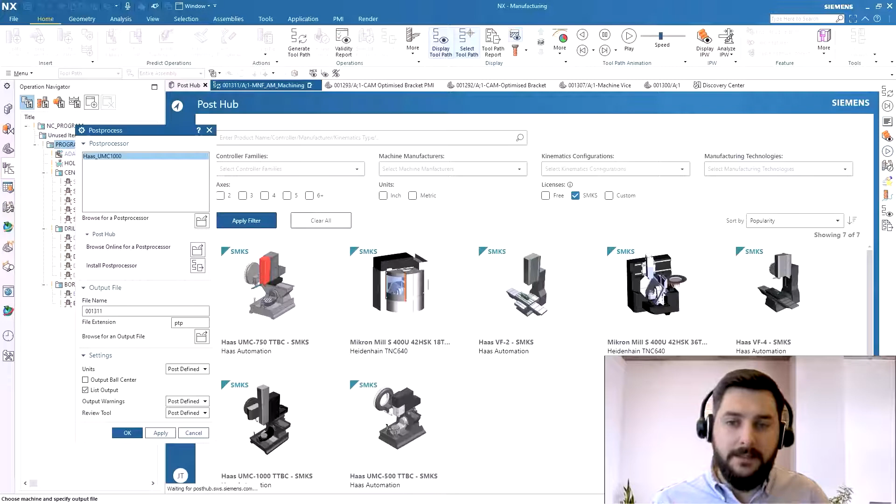Here we have the Smart Machine Toolkits. Smart Machine Toolkits not only give us a working post processor, but also give us the full machine tool graphics and a simulation driver which enables us to validate and simulate the NC code. So for this example, I'll choose the Haas UMC and simply and dynamically download that Smart Machine Toolkit directly into NX.

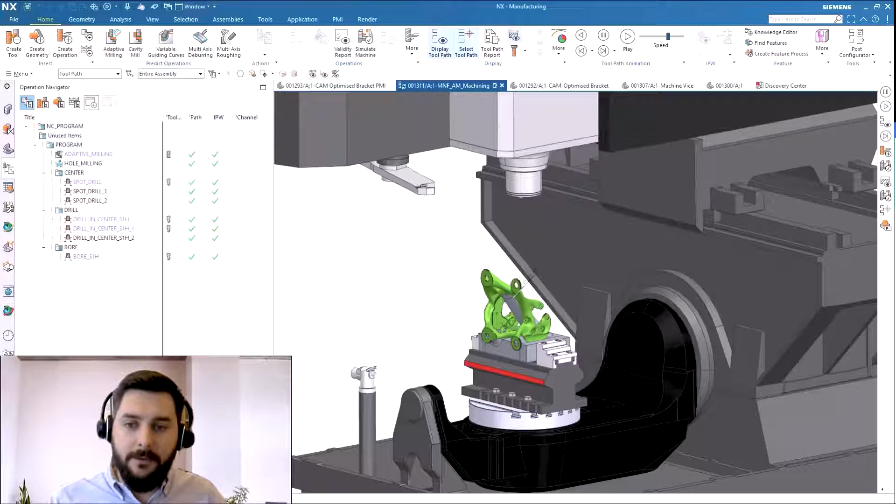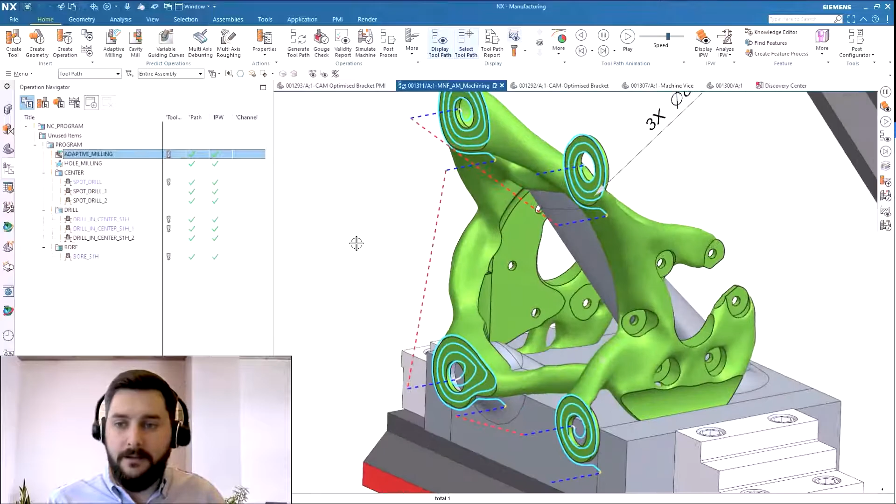Next, we'll take a look at the machine operations required to finish machine the key features of this additively manufactured component. The machine operations are really simple to create in NX and work really well with the data that came directly out of the additive manufacturing environment. Let's take a look at the first 2 milling operations that we're going to use. Firstly, to remove the extra material from the part, I'm going to use a adaptive milling toolpath. And secondly, a helical hole milling toolpath to open up the holes.

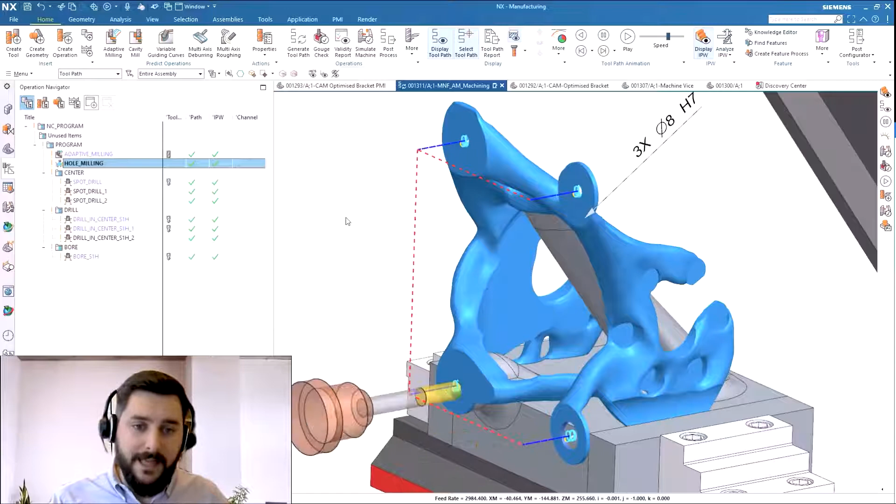Let's take a look at the material being removed so you can get a better understanding of how CAM toolpaths work. So, with minimal input, we're able to create these really optimized machining toolpaths to remove the remainder of material from the bottom of the hole of the additive component. Using the same tool, we can then open up the hole from the reference size that came off the printer itself to the finished design size of the component.

The next thing we need to do is look at the 12 holes that need to be drilled and machined to finish size. You can see we've got some PMI attached to these 3 holes. These 3 holes have a tolerance against them, a limit of fit in fact, because they're locator holes and require a tighter tolerance to fit dowels during assembly.

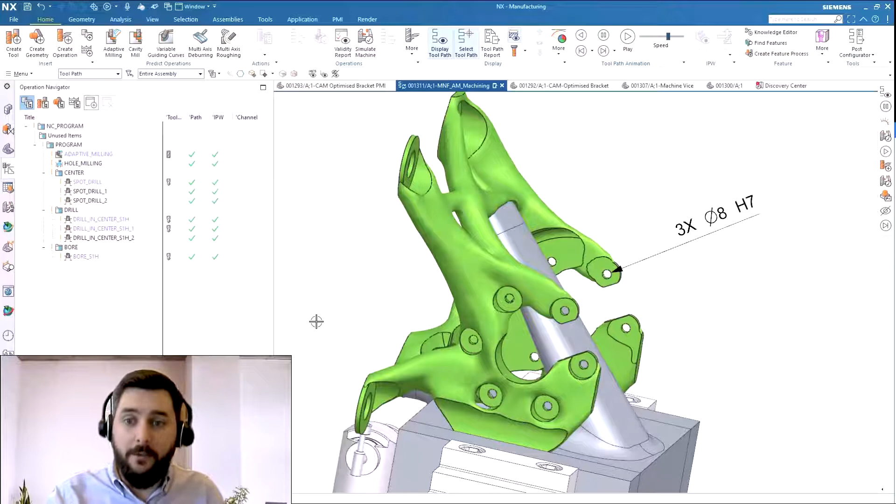What I'm about to show you is process automation within NX CAM. What NX CAM can do is look at the features on our component and decide which tools and which operation types are best suited to machine those features. As well as that, NX will read in the PMI data and tolerances to directly influence which operations are needed to meet those tolerance requirements.

Let's take a look at these features in the Feature Navigator. As we can see, NX has found all 12 of the holes and identified 3 of them as having PMI data against them. If we take a look at the holes without PMI, we can see that for these 3 holes, NX has decided to create a spot drilling operation followed by a drilling operation, and the drill will be the finished size to finish the hole.

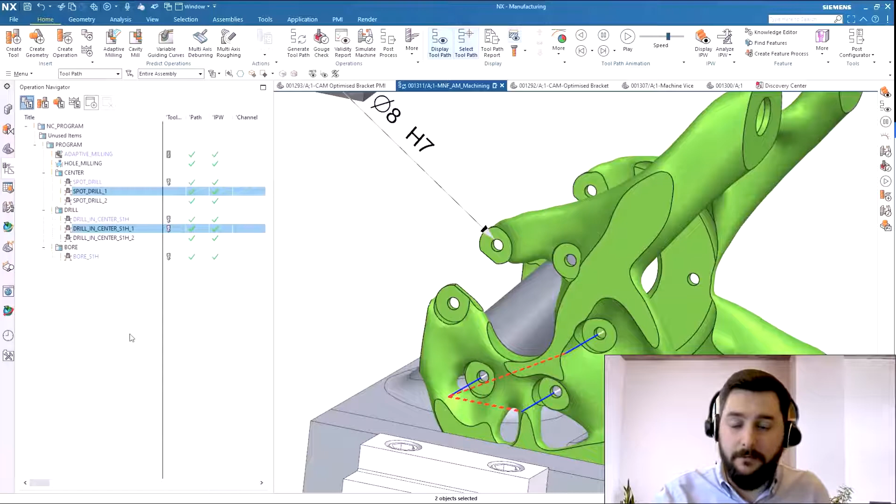Let's take a quick look at those operations being machined. Firstly, we see the spot drilling, followed by the drill, and that drill will finish those holes to size.

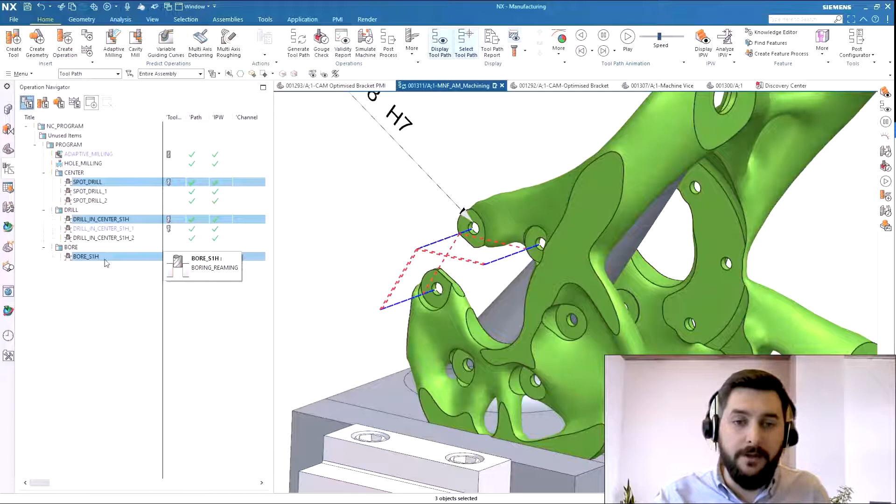If we go back to Feature Navigator and take a look at the holes that have PMI attached to them, and if I go and find the related operations, this time you'll see that NX has created 3 machining operations. It's created a spot drill operation to spot the holes. It's created a drilling operation using a slightly smaller tool this time, and then it's finishing the hole size with a boring tool to the tolerance that the PMI has defined.

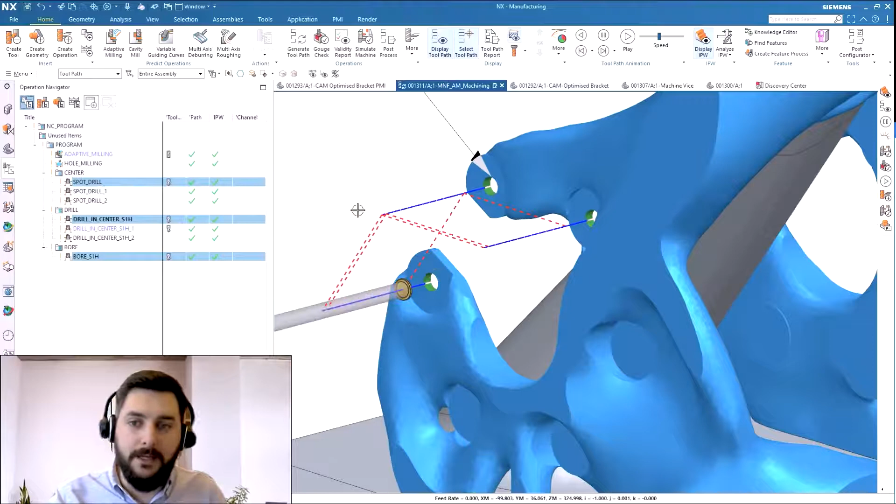And this is a great example of how intelligence from the design side of NX can drive the automation of the manufacturing side as well. Let's take a quick look at what that looks like. So again, we can see the spot drill, followed by the drill, again, drilling slightly smaller. And finally, we can see the boring tool coming in and finishing the diameter for those holes to the tolerance.

So finally, let's take a look at how we validate the program that's being created. It's really important that the NC code that's going to run on the physical machine on the shop floor can be validated and checked to ensure that there's no gouges, no collisions, and that the tool path is of a high quality. To do that, we utilize our machine tool simulation.

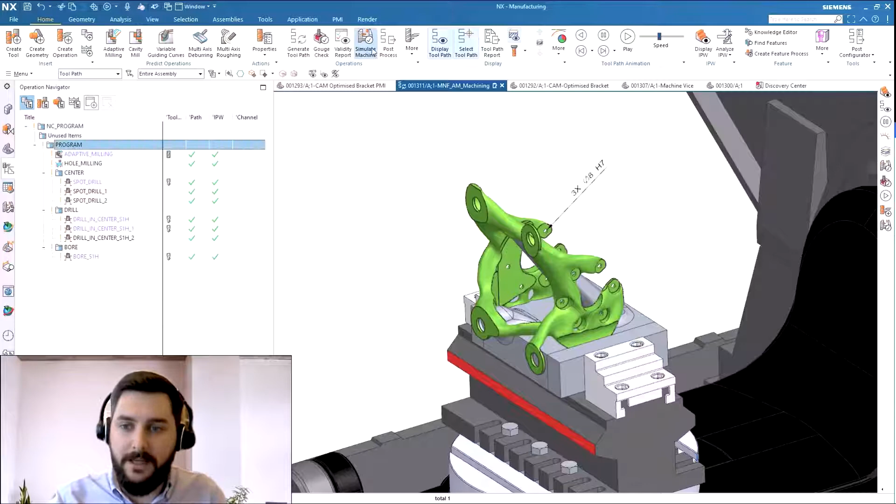Earlier on, we downloaded the Smart Machine Toolkit, which contained the machine graphics to give us context of the machine, as well as the post processor, so that we can output to the machine tool that matches what we have on the shop floor. But what it also gave us was a simulation driver, and that simulation driver is going to verify and validate that the toolpath is collision-free and safe before we use it on the shop floor.

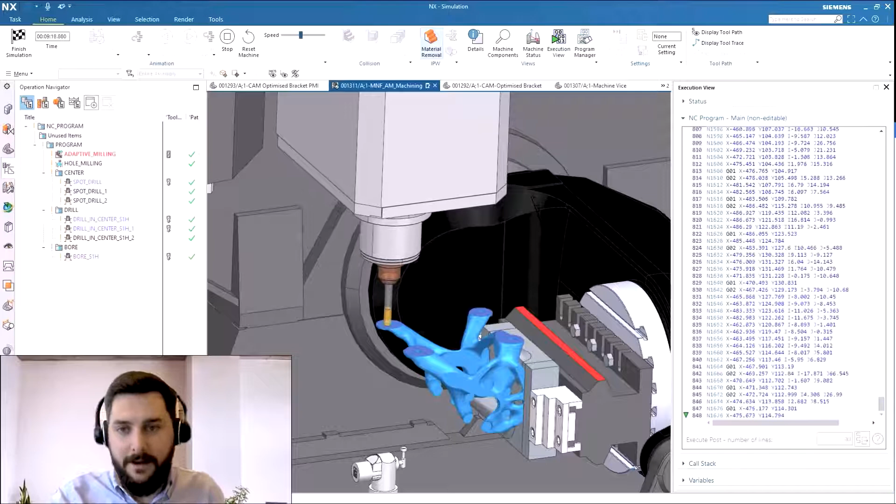On the right-hand side of the simulation, you'll see that the post-processed NC code is running down in just the same way as it will on the CNC controller. And that NC code is driving the machine tool kinematics in NX to give a true digital twin validation of the CAM program, including material removal and a much more accurate machining time. NX is the only CAM tool that offers integrated NC simulation and is a fantastic way of validating and ensuring a safe collision-free toolpath. This concludes the portion of the demo regarding the finished machining in NX CAM.

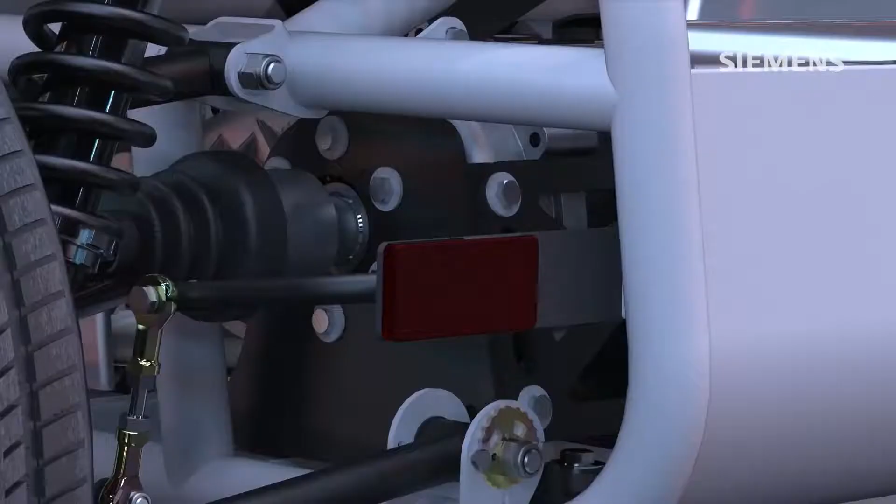And what we've seen today is how we can take both data from design and also data directly out of the AM application to create custom fixturing to hold that component and to validate the NC program that has been created to finish machine these components. Now that the part is printed and machined to its final dimensions, we can assemble it back onto the vehicle. So, we've covered a lot of ground today, from topology optimization through simulation to additive manufacturing and CAM.